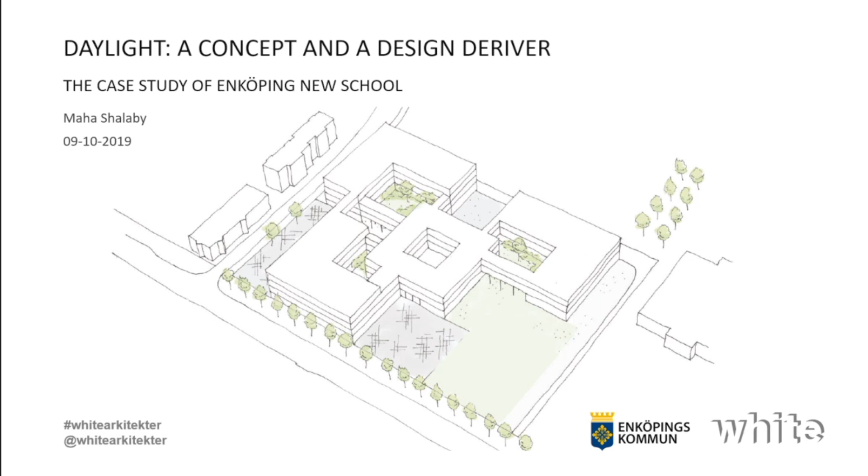We had high ambitions in this project for achieving good daylight and healthy environments both indoors and outdoors, and we decided that daylight and sunlight are key factors that we will focus on in this project, because in Sweden the weather is most of the time dark and cloudy.

In the presentation, I'm going to talk about how we integrated the simulations within the design process, the simulation tools and the interoperability between software, and some of the results that we had, and some conclusions and recommendations.

Just to give you a brief introduction about White and about myself: White is Scandinavia's leading architectural practice and the third largest in Europe, with projects across Europe, America, and Africa.

I work in Stockholm, but I'm part of a digital sustainable team with different people in Stockholm, Malmö, and Gothenburg. We work with different types of simulations and also with research and development of tools internally.

This project was special because I was involved from day one, from when we were deciding on the program. I worked both as an architect and as a sustainability specialist in the project. I would like to give special thanks to the architecture team for allowing such an opportunity to happen.

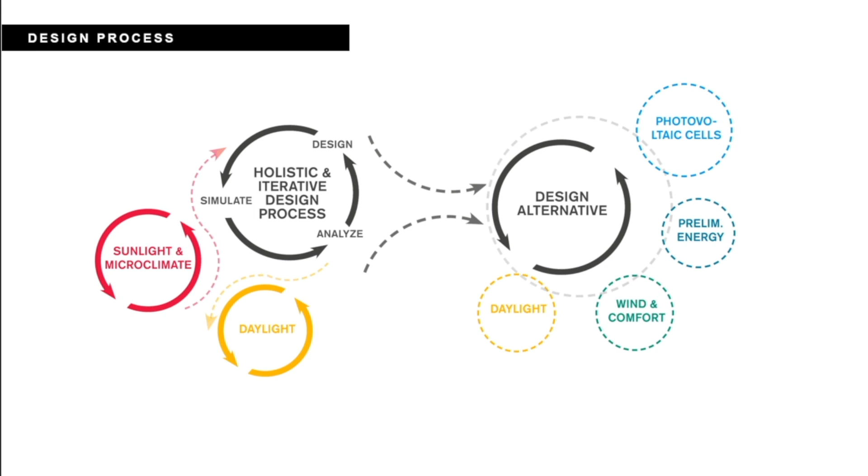All of this was thanks to the tools and methods that we have developed internally, part of a package we called Inform. There are four tools: two of them are on the urban level and another two are on the building level.

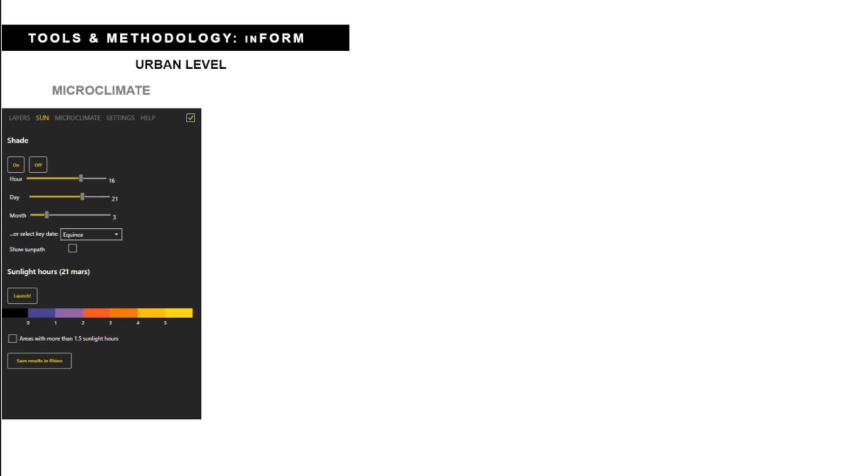The first one is used to simulate sunlight hours outside the building and also thermal comfort. The second one is used to simulate the daylight and sunlight outside on the facade.

On the building level, we have a tool for simulating daylight factor, and it's only daylight factor because that's based on the Swedish regulations, unfortunately.

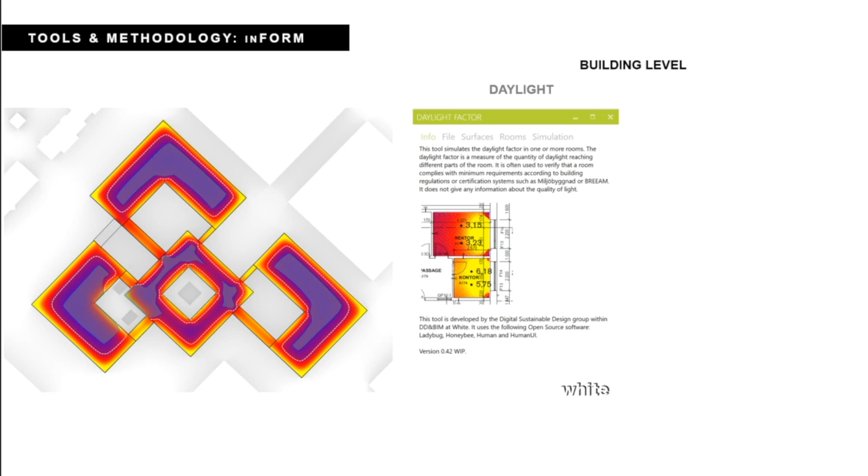But we aim to do other simulations usually when we're involved in the design process. The fourth tool is early stage energy indicators that includes the form factor, average U value, and also primary energy based on steady-state energy calculations.

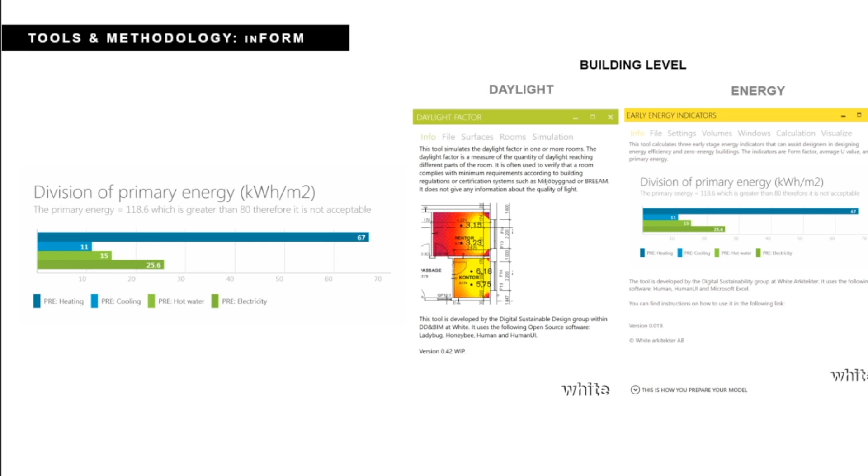This project was a pilot project where we have used the four tools to inform the design decisions iteratively the whole way.

We also discussed within the design team questions of interoperability between tools, to exchange information and make sure that we have an optimized process for exchanging models and to make the simulation process much easier. This actually helped in reducing the number of hours that we have used for the simulations.

We used 3 times less time when doing the simulations in comparison to if we had done it at a later stage in the project.

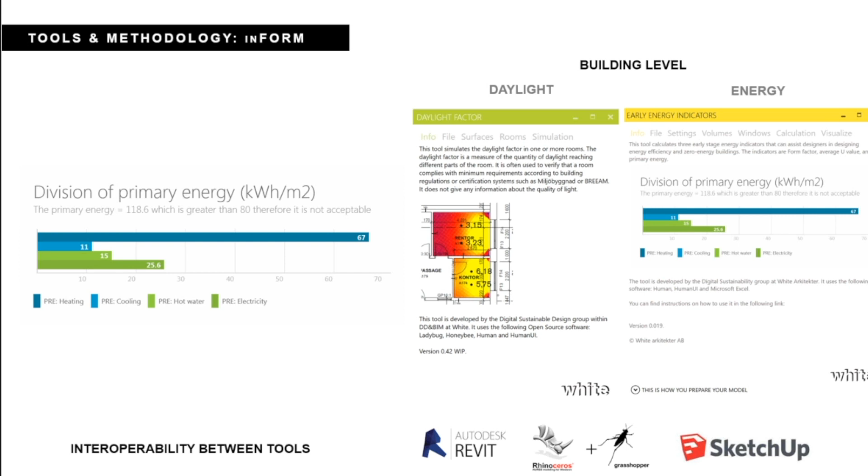Like I've mentioned, we studied different alternatives, and these are 2 of the alternatives that we have studied. We've also analyzed the sunlight hours received outside and implemented different daylight concepts within the project.

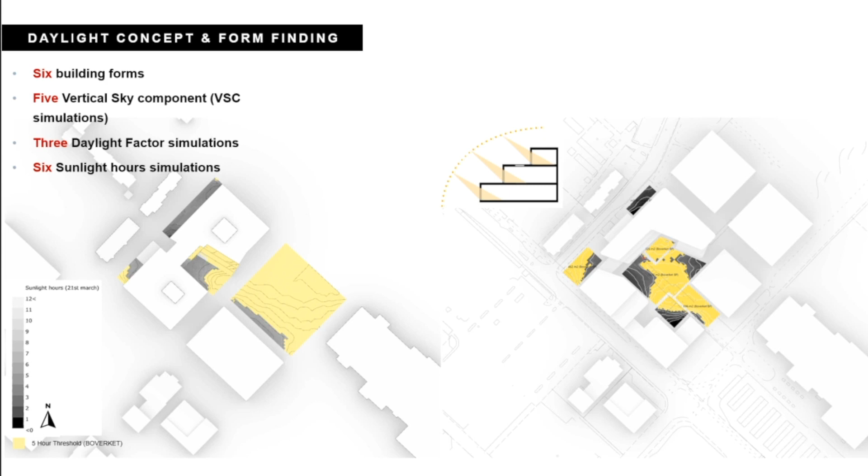Until we reached one building form, and we integrated also sustainability concepts that were dependent on the sunlight exposure, such as maximizing the unshaded roof area for photovoltaic cells, maximizing the sun exposure in outdoor areas, and having a green roof for biodiversity.

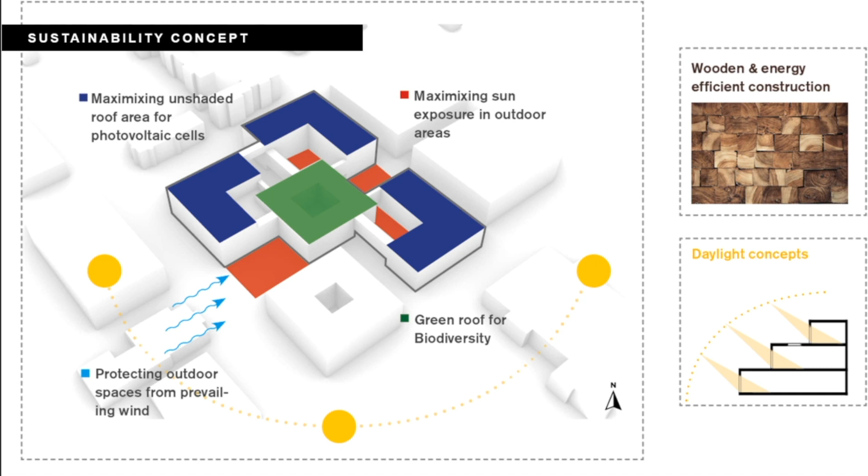Still, we could see that we did not have enough sunlight hours. However, in Sweden in March it's usually cold outside, maybe maximum 5-6 degrees, so people don't spend so much time outside.

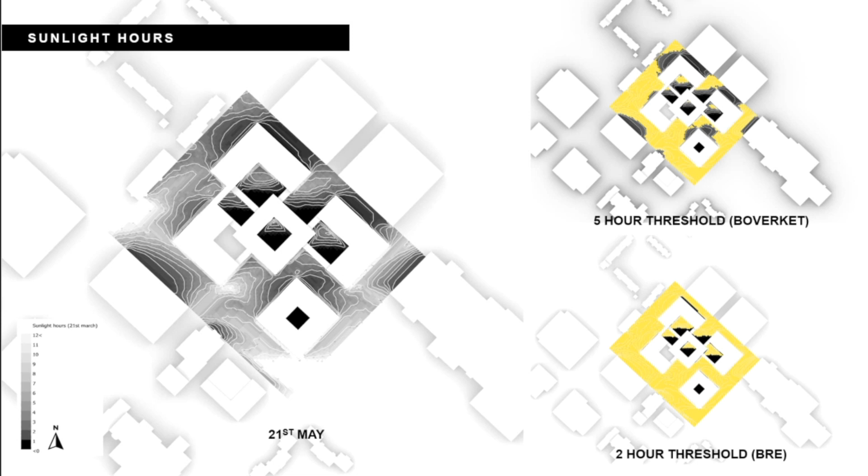So I've also analyzed the sunlight hours in May, and from there we could see that the results got better. But one conclusion we had was that it was hard to derive a threshold for informing the design based on the Swedish climate.

And parallel to that, despite not having a metric for evaluating daylight at an early stage when optimizing the building form, we did a vertical sky component to fine-tune the design, varying the building heights, positions and sizes to maximize daylight exposure on the outside facade.

From there, we could see there would be some challenge in meeting the daylight requirements on the ground and first floor in these courtyards, and also some challenge in meeting daylight requirements facing the newly developed context.

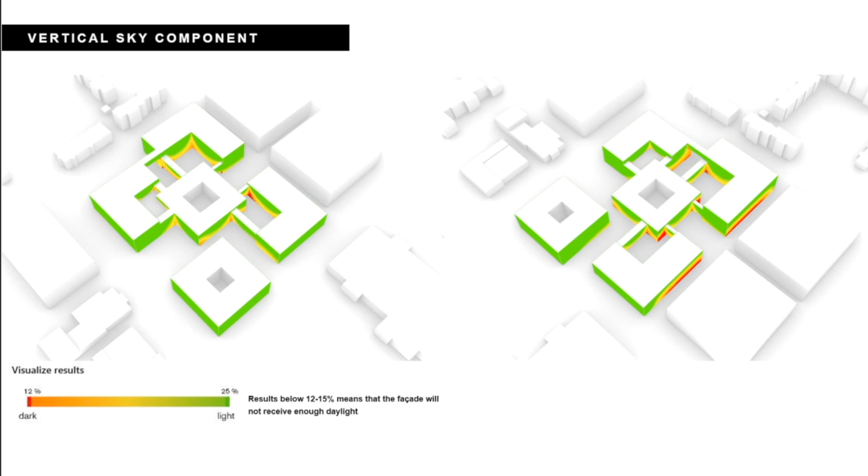However, this context is still going to be planned, so we had an opportunity to inform the design team and also the municipality about the distance between our building and the newly developed context.

After that, at another stage, we did a daylight factor simulation. In this stage of the project, we only did the daylight factor because this is present in the Swedish regulations. In this project, we were aiming to reach Miljöbyggnad Silver level, a Swedish certification system similar to LEED and BREEAM.

We were aiming, in this project, to have a 1.2 daylight factor threshold. When we talk about 1.2 daylight factor, that means we would need, according to Swedish regulations, a 1.2% daylight factor in the middle of the floor plan.

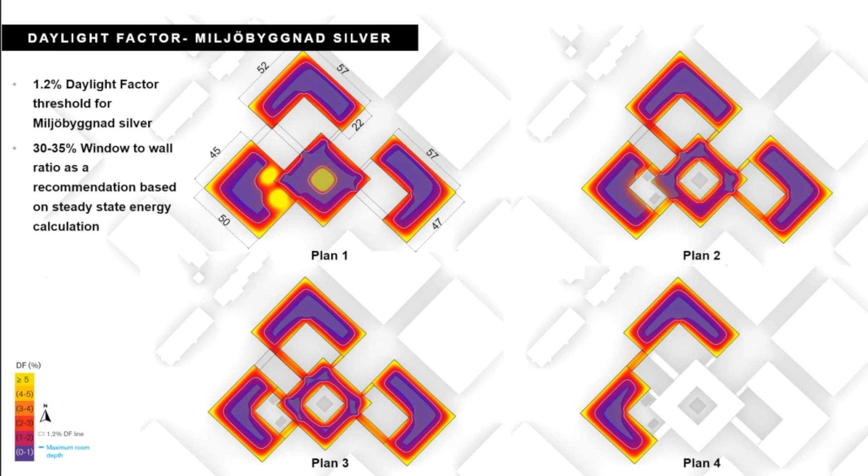The lines in white are the 1.2% daylight factor, and the purple area in the middle represents the maximum room depth you can have in each of the floor plans in all the volumes. I won't go into detail here because we still need to optimize the atrium we're having, and also the position and size of the skylights.

But I've made this image as a summary of the results for the four floor plans, and for each building volume A, B, C, D, with the percentage of non-daylit area and percentage of daylit area. On average, for the whole building, we had approximately 80% daylit area, because we optimized the building form at a very early stage and didn't wait until a later stage when it would be hard to already alter the design.

At a later stage in the project, when we work more with the program in the next stages, we will also add the areas with the daylight requirements needed for each floor plan, so that we make sure the areas in the program that need daylight are fulfilled.

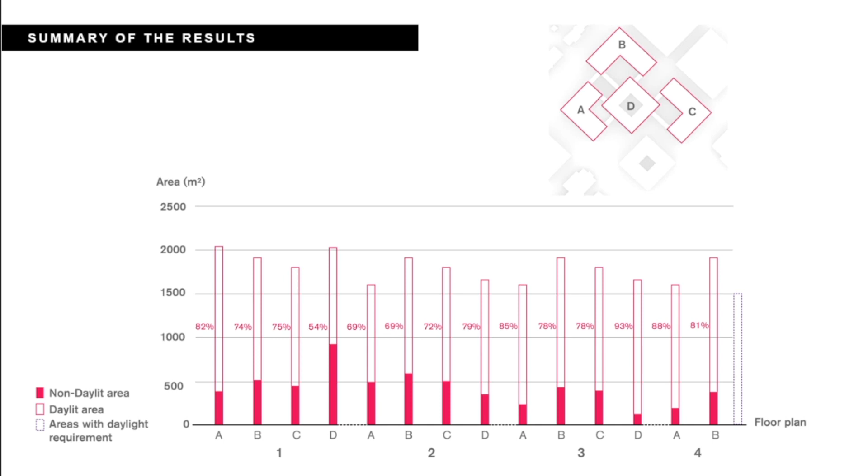I also did a comparison with the new European standard. To simplify, this is the floor plan I've shown before - this is plan 2 with 30% glass-to-wall ratio.

And I forgot to mention that in the simulation for the daylight factor, we used 30 to 35% glass-to-wall ratio, based on a recommendation from the preliminary energy analysis using a steady-state calculation. That's because we also have very strict requirements when it comes to energy, so we can't just work with daylight - we need to work with daylight and energy in an iterative way.

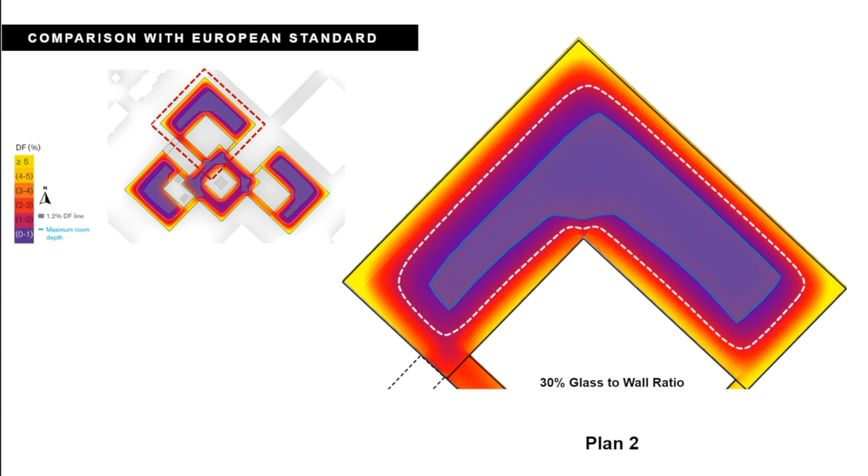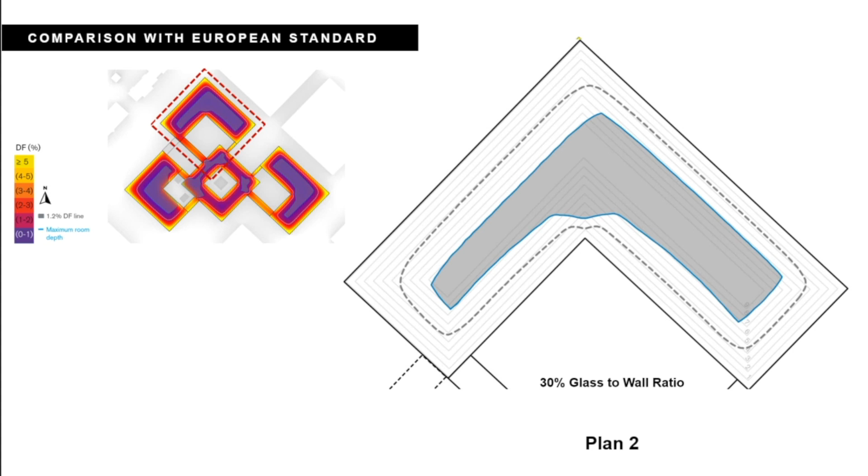And from there - so this line is the 1.2 line, and the blue line is the maximum room depth you can have in the different facades. We could reach up to 8 and 7 meters depth.

After that, to go into more detail, I've added some rooms that are 7.2 by 8.4 meters, with 8.4 being this depth. We could see that the 1.2 line is approximately in the middle of the space as required in the Swedish regulations, so in most of these rooms we would actually meet the daylight factor requirements.

The gray areas are the areas that wouldn't meet the requirements. However, in the back of the room, you can have different circulation or storage areas. This was done using a 30% glass-to-wall ratio.

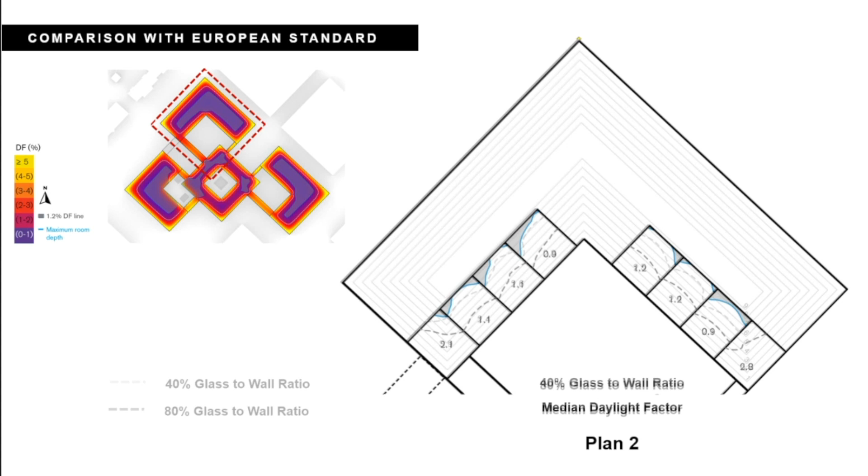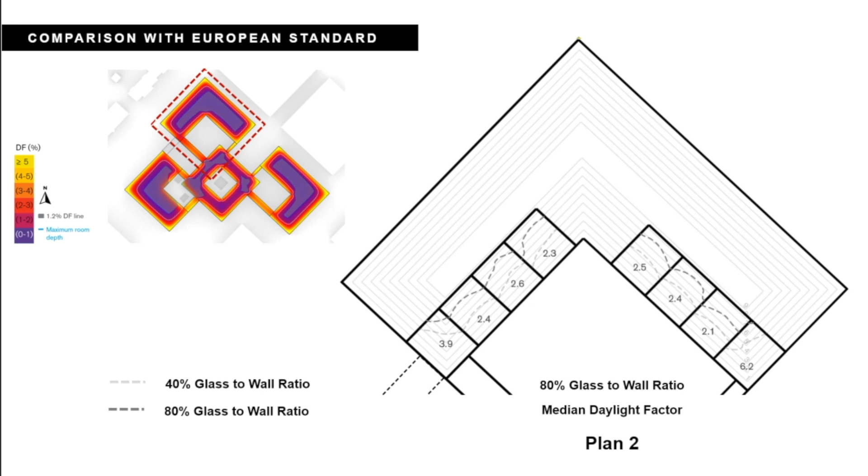We also evaluated the median daylight factor, and you can see on average the median is between 1.1 and 1.2%. In comparison to the new European standard, this median value requirement is 2.5, far off from what could actually be achieved. Just to test, we could only achieve this value using an 80% glass-to-wall ratio.

So in conclusions and recommendations, optimizing the use of tools within the design process is a key factor towards daylit space and comfortable outdoor spaces. Working interdisciplinary is essential at an early stage.

From that process, working both as an architect and as a specialist gave a lot of input - both to the architects, to understand more how we work with light and about the daylight requirements, and also for me, to understand what requirements the architects need to inform the design in a correct way. It's also a challenge to meet the European standard in the Swedish climate.